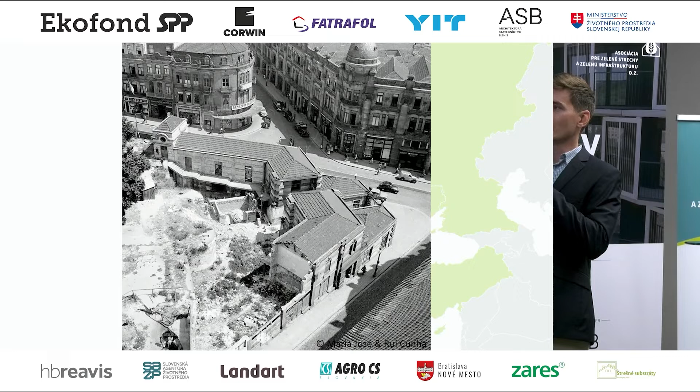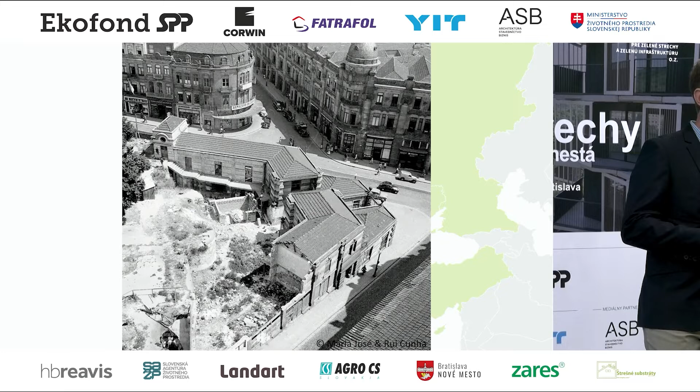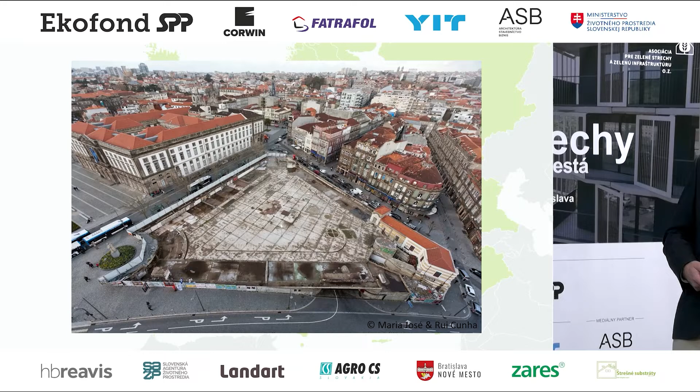So the original layout of the square is gone, and a new project was created. The marketplace was preserved, and there we have underground parking and some greenery. As time goes, there was the need to adjust the square, so reconstruction took place, and this beautiful shopping center grew up. On the top of the roof there's a huge park where they replanted olive trees, very old, like about 150 years old - there's a rooftop city, we can say. Those who were in Porto could see there is a need for greenery in the city center, and the historical building is still present there.

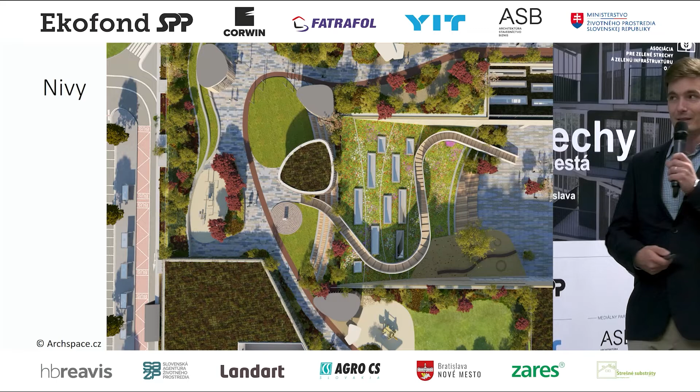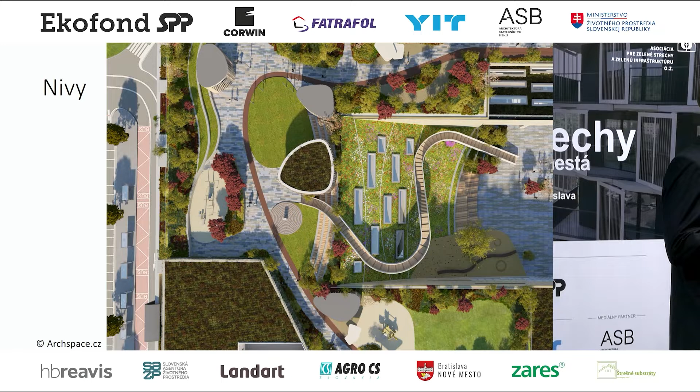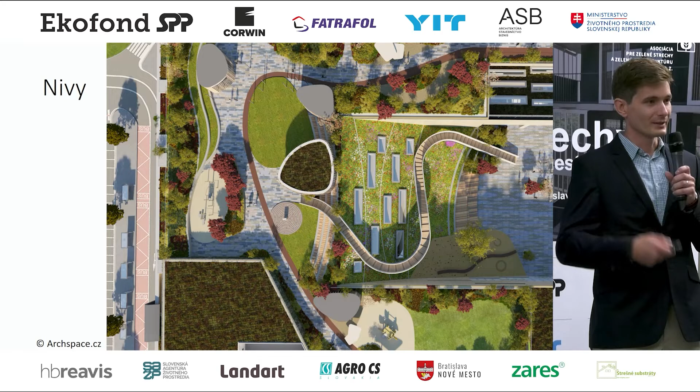In Bratislava, there's also a project that originally had a function corresponding to that time, but currently there's a project called Nivy Shopping Center, with a rooftop garden that is publicly accessible. So I wanted to illustrate the development of cities depending on the need that should be included in the architecture. Considering climate change and our feeling in cities, we need nature to be healthy, to feel well - so we need more greenery and to avoid overheating of cities.

Why support green roofs? There were many reasons mentioned here already. We did two economic studies with the University of Ústí nad Labem, based on benefit analyses that measured costs or expenses and also the rentability of the costs invested - what are the financial benefits, and also indirect and direct benefits. Indirect benefits, for example, cooling, irrigation, some retention tank on a green roof, or sound insulation - these were all factors involved in the study.